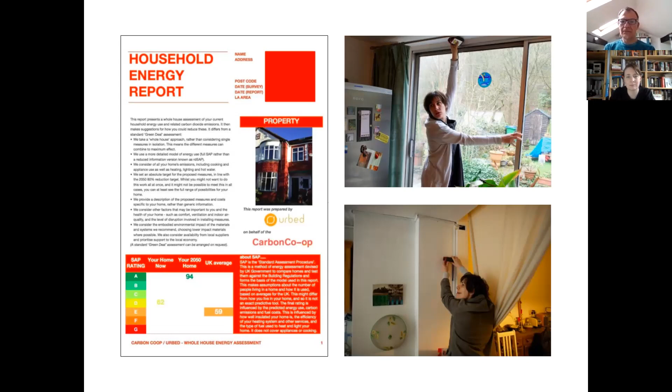There was then an extensive design development phase, which was a fairly prolonged process. Do you want to comment on this, Marianne? This is one of your areas of expertise. Yeah, so I think something that had maybe been missed a little bit when it comes to owner-occupier whole house retrofit, is that every single one of the houses on the programme and every single one of the householders were different. So their budgets were slightly different, their needs were all different.

So it wasn't a case of getting a kind of really simple Green Deal assessment or ECO assessment and then just deploying a standard set of measures. The measures were all tailored to those houses and to those people. And to get to a point where you had something that was agreed, that worked with the house and also worked with people's budgets, because people were prepared to borrow a greater or lesser amount, or they had more or less of their own money to put in.

So the budgets varied quite a bit, from probably something in the region of £20,000 up to, I think the biggest one was about £60,000. So it's quite a big range. And we had to make all of the design work fit to that. So there was quite a bit of iterative development of that, going backwards and forwards, seeing what fitted. And then working that up in more detail for the construction contract as well.

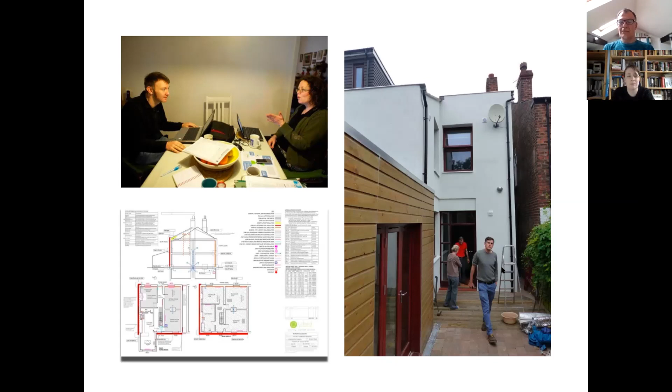Yeah, that's the process. And that's the back of Dom's house. Yeah, I should say that's after the work was done. Or when it was nearly finished anyway.

Yeah. This, in very broad terms, is the contractual arrangement that I was talking about. So there was all the householders at the top, and then Carbon Co-op sitting in between the householders and the contractor. So we were able to manage the contract and oversee quality and also cost to a certain extent. And then Urbed acting as design team, but also administrating the contract between us and the contractor. And the contractor also bringing in subcontractors.

We also procured some PV panels, and we did that directly, away from the contractor. So we took on a hell of a lot of project risk here, playing this role. But the payoff was around quality and oversight. Yeah, for those who know about such things, it was a traditional contract as well. So when we were doing contract admin, it gave us a reasonable degree of control over what was done, and we could ask for things to be put right and be quite specific about what products were used.

Marianne sort of beat me to this about the ECO, but yeah, the ECO didn't really work out. We did get some ECO, but there were some horrific problems with it. It wasn't really fit for purpose. It took so much time. It was so time intensive, and it was just awful. It's not really relevant to us.

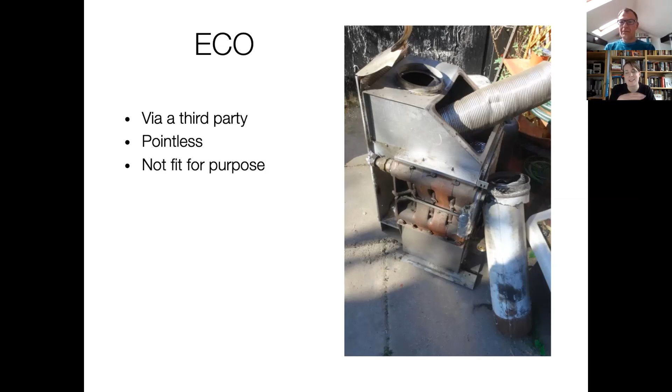No, I think the way to express it is that if you did the timesheets for my colleague Helen, who did a lot of the paperwork on it, and saw how much money we got, if we charged full whack for her time, they'd have cancelled each other out, because it was just that much of an administrative burden.

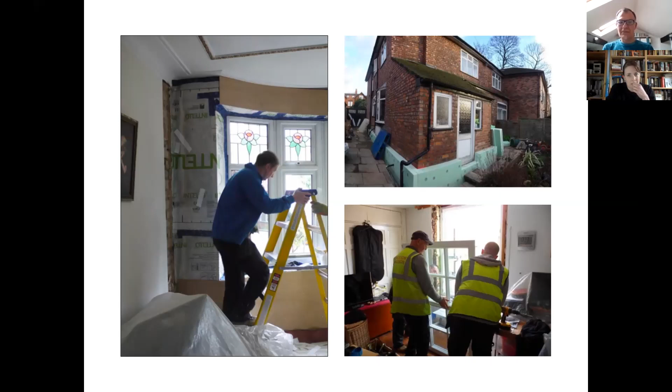Yes. So most of the design work took place in 2013, and then we started on site in 2014. And you can see some of the work going on here. Extensive work, external wall insulation for every home, internal wall insulation, I think practically for every home, not for Dom's. Triple glazed windows, ventilation systems, large scale works, lots going on. Do you want to say anything about that, Marianne?

Well, I suppose in general, our targets at the time were to achieve an 80% reduction in carbon emissions from a 1990 baseline. So it was similar to the targets from the TSB Retrofit for the Future programme that had gone on a few years before. But in general, what that meant was reducing people's space heating demands by quite a chunk, so a lot of the work was focused on insulation and better windows and doing what we could on air tightness, but I won't preempt some of the stuff Dom's going to say on that.

And here are some pictures of the work afterwards. I won't say too much. I mean, it's a fantastic project and some really great work. Some lovely pictures, solar PV panels, lovely windows. And we've done a lot since around opening up the homes for people to come in and do eco home tours and share the learning.

So the project, so 2014, the work's going on, and most of the PV panels went on towards the end of 2014, some to the beginning of 2015. So a long-term project. Dom's going to talk now. I'm going to hand over, and he'll talk about the data that we all want to hear about.

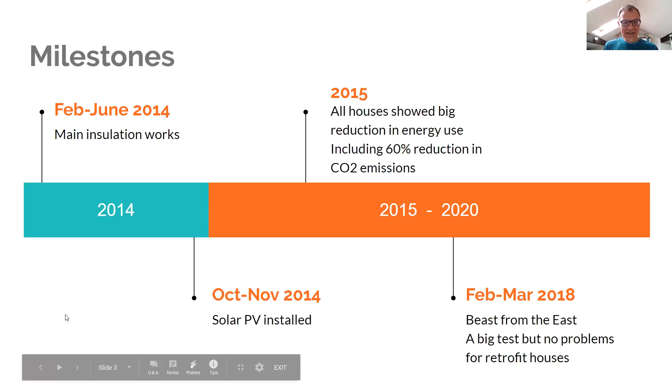And also I was encouraging other householders to collect just their bill data, their gas and electricity data. So that was coming through as well from a few of the houses. And that's what we've got here. This is the main feature of my presentation, is about 4 to 6 houses that I've got 4 still now. There were 6 or 7 back in 2015 providing me with data, but we're 5 years on now. So obviously the number of people sharing data has kind of reduced, but it's still useful.

So what am I going to talk about? What have we learned? I'm going to talk about the energy performance, the big headlines that come out of that. I'm going to talk about comfort take, whether there is any, how it happens, whether we should call it comfort take, all that kind of stuff. Learning to live with the houses, what other comments have come through a little bit on that. The good and the bad, and I'm not going to touch on the contractor too much. I'm just going to say what the outcome is and that kind of stuff. And yeah, what next?

So the big headlines are big savings in gas use. So over the 5 years, it's been relatively constant. It's been 44% reduction in gas use for the houses that I'm collecting data for. And 47% reduction in space heating demand. Yeah, as I've said, it's quite stable. Individual households have gone up and down a bit, but if you look at the totality of the heating and gas use, it's been very stable, from a big reduction from before the retrofit and then stable afterwards.

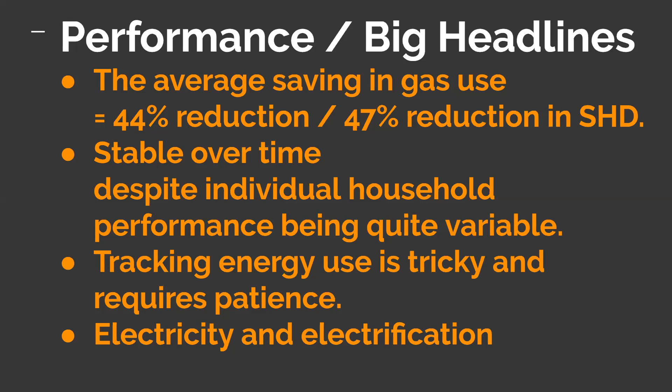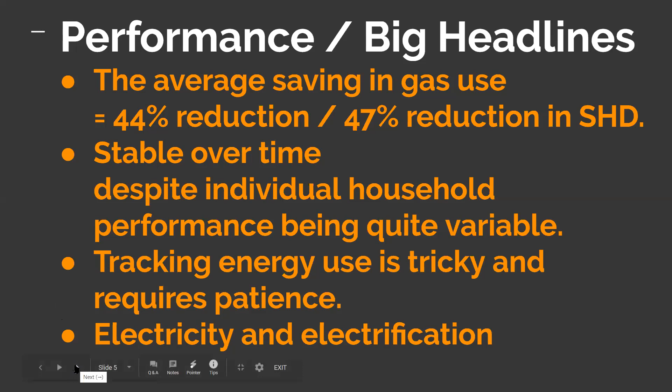Yeah, I'm going to talk about how tracking energy use, space heating is quite tricky and needs quite a bit of patience. You need a lot of data. And then I'm going to talk about the future and electricity and electrification of heat and that sort of stuff. So I'm going to go straight into comfort take and the fact that maybe we shouldn't always call it comfort take.

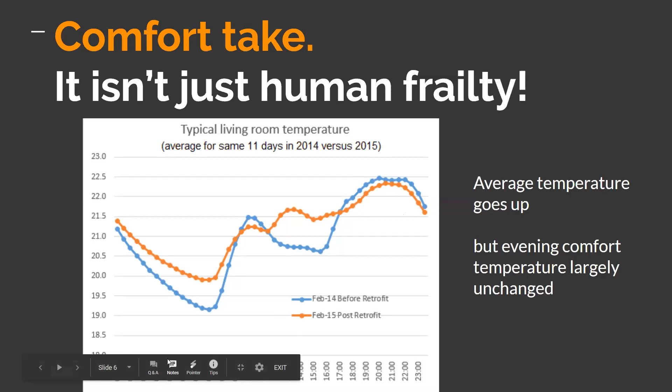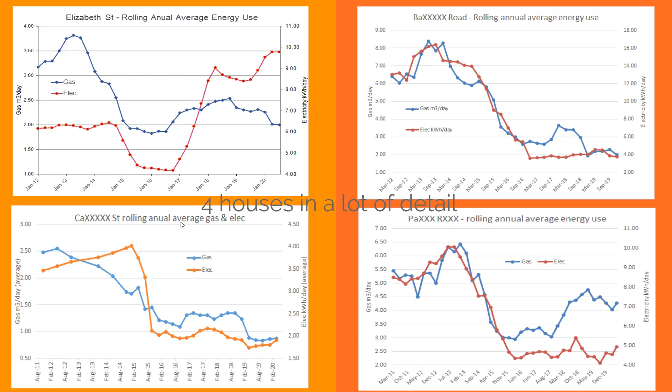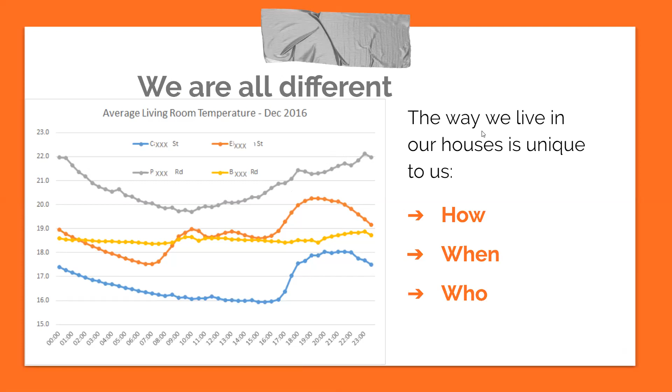So yeah, the way we live is unique to us all. Each house is different, how we live in it, when we heat the house, what kind of age group is in the house. These 4 houses, they're all different. Some of them have got 3 people or 4 people in them. Some are just single occupiers.

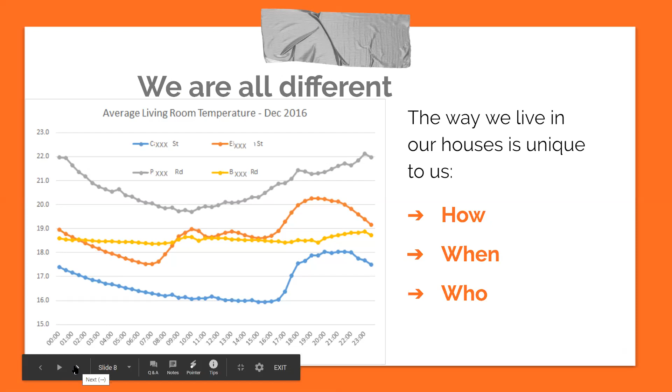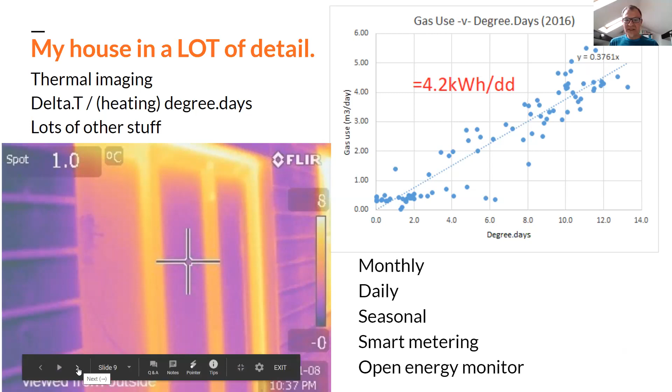This is an example of using degree days and a regression analysis for 2016. And I've got data as monthly, daily, seasonal. I've got smart meter data. I use the Open Energy Monitor to collect electricity and temperature data inside the house.

Tom? Just before you go on, we've had a question from one of the attendees just asking if you could repeat what the changes were to your house, what made a difference to that temperature.

Sure. Well, the retrofit that we had on our house was external wall insulation on 3 sides, the rear and the sort of outrigger bit at the back of the house. The front of the house, we had a little cavity which was filled with cavity wall insulation, just enough to warrant it. We had triple glazing on 3 windows, and we had underfloor insulation,

and we had a passive stack ventilation system initially designed, but it was changed to passive inlet vents with MEV, mechanical extract ventilation, because of problems trying to install the stack, which was only uncovered while the works were happening. All of that has made a big difference to our house.

It's warmer by 1 or 2 degrees. And things like the Beast from the East that would otherwise have been quite chilly in the house was no problem. I'll come on to what was good and what was bad in a bit. Hopefully that answers that little question.

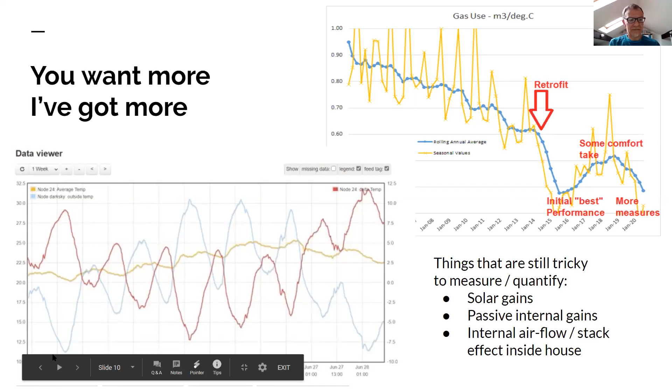We've got a 60% reduction in carbon emissions from before the retrofits to after, and I think that's pretty close to an 80% reduction compared to the average houses in the UK. The householders were generally, on average, lower energy users than the average before the retrofits anyway.

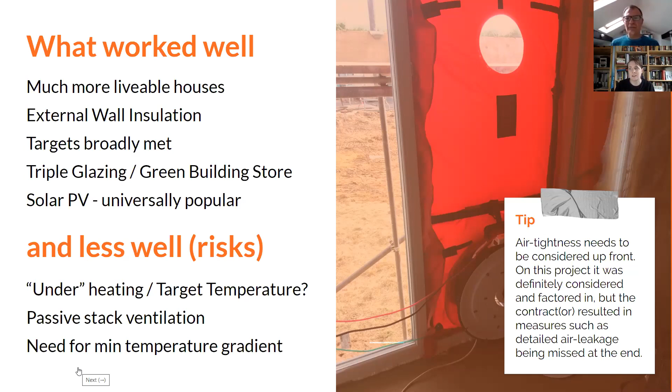So I'm nearing the end of my presentation, but oops, where's it gone? Oh.

So what next? When these retrofits were done, everyone kept a gas boiler, is the main headline. So everyone still has gas heating, but I think at some point we'll move to electrification of heat. And I think all of these houses are probably ready for that in one form or another, although a lot of them have got combi boilers, and that's going to be tricky to replace with heat pumps.

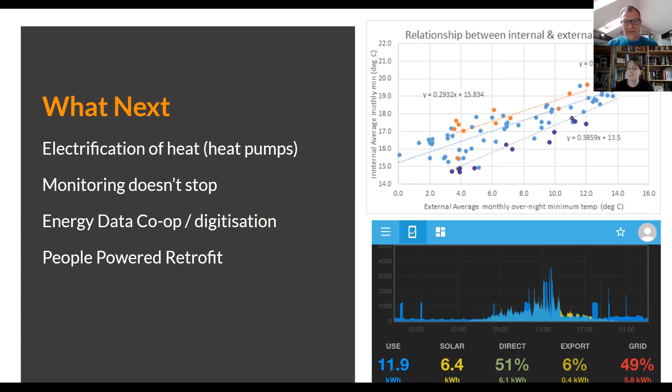I'm sure Kate and some other people would love to see that as well, and maybe, sorry, before we go on to that, did you have anything else, or were you just going on to questions anyway? That's it. The next thing, Q&A. I wanted to say that we've got Rachel and Mike, so it'd be nice to just hear a little bit of reflection from them, maybe not as technical, not as graphic heavy. And maybe while they do that, Dom, you could fish out your Sunamp data. Yeah. So Mike and Rachel, did you want to reflect on the stuff that Dom's been talking about?

So we'd agree without the data, really. I mean, the house is definitely more livable. It's much more comfortable. We don't have black mold in the corner of the house, which is really good. Well, I suppose it's interesting for you to know what we had done. We didn't get the external wall insulation done. Because of the problems with the contractor, our house sort of fell off the end of where you could get grant payments. So we weren't able to get any grant payments for external wall insulation.

So we have got really decent loft insulation, underfloor insulation, which was quite a complex, tricky problem to solve because of a lot of dampness under the floor. So we have got perhaps some useful information around that if people are interested. We've got solar panels. We had a battery added later, and anything else? The triple glazing. Oh really, yeah, triple glazing. That's had a brilliant impact. Yeah. And that's just improved quality of life as well, because it makes the house a lot quieter.

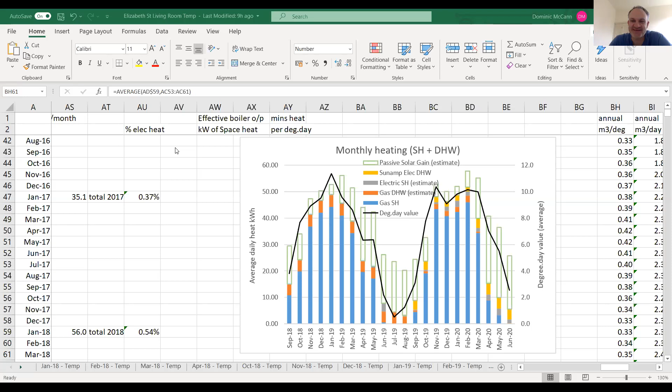Fantastic. Do you want to know any of the rubbish about it? Well, let's see what the questions are. Dom, do you want to come back to the Sunamp? Yeah. So, can everyone see this?

Yes. So this is approximately 2 years of our heating from September 2018 through to June now. The blue bits are space heating, essentially, of gas. The dark orange here is our hot water using gas. And then we had the Sunamp installed just at the end of August last year. So the light orange is where the Sunamp has taken over our hot water to a greater or lesser extent, depending on the month.

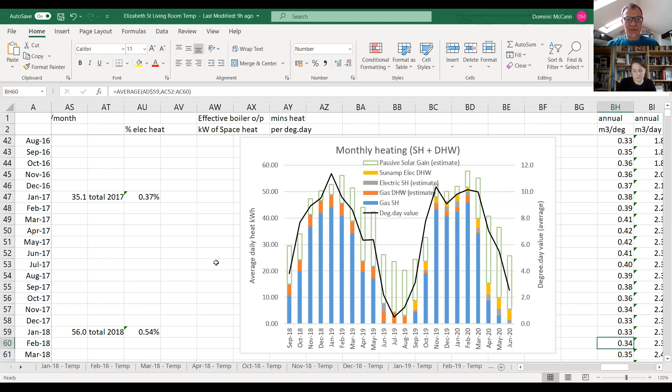Do you want to explain quickly what a Sunamp is? Yes, it's essentially a hot water tank, but doesn't store it as hot water. It stores it as a phase change in a phase change material, and a pipe goes through that material and heats the hot water as it flows through it. So you're able to store electricity, or you could even use solar thermal to change the phase of the material in the Sunamp, which they call a heat battery. So it stores heat, and when you need hot water, it runs straight through the Sunamp, so it becomes instant hot water. And yeah, that's what it is.